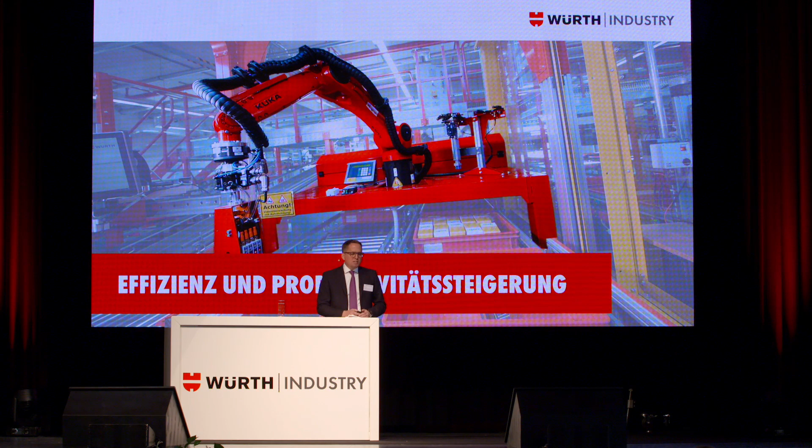This is certainly a challenge in this respect. It is all about bundling, pooling quantities, tied capital versus supply frequency and available inventories or parts at the workplace. The top objective is increasing efficiency, gaining productivity. For you, as our customers, this means saving distances to be covered, saving time for your workers. At the end of the day, this means reducing costs. This by way of introduction to this topic.

What was the situation yesterday? What was it like? You see, the worker was in the focus, center stage of everything that is going on in assembly. In addition, the assembly or production worker also had to handle a lot of unproductive processes, logistics processes, around the entire job.

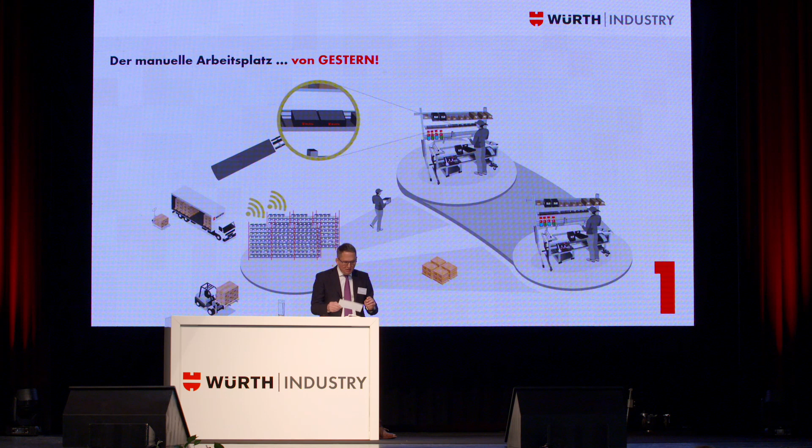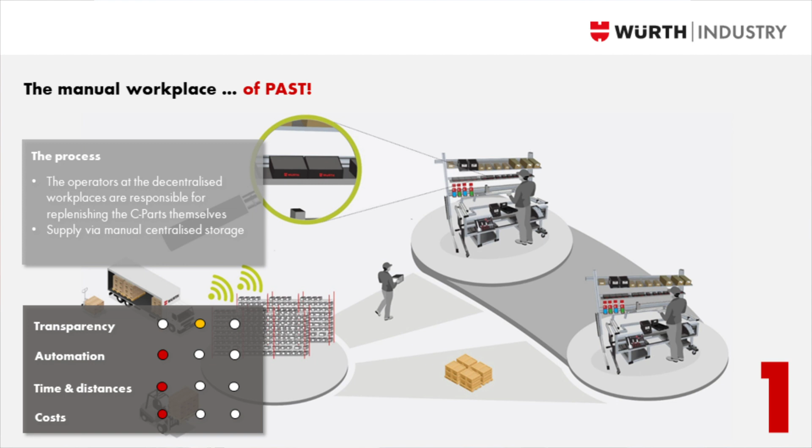Having a closer look at the shop floor, here we see two workplaces, and we also see our central warehouse outlined here. This chart will stay with us during this presentation, showing how it has changed over time, where we see changes, and what we think the future will look like. What is the process or sequence of steps?

The worker at a decentralized workplace is responsible for supplying C parts, either getting them from the central warehouse or from the respective supply supermarkets. Transparency is given in the central warehouse because of our tracking system. The level of automation is relatively low, and this is not ideal in terms of costs, because the time for unproductive jobs is relatively long, so this is time lost.

As industry service, we invested a lot of energy, time and effort looking at the processes and Kanban systems of our customers and at our place. In the past, we focused on the processes which we need on a production line or in our warehouses. So the foundation we laid was standardizing our systems.

1.8 million bins, this is what Martin Reuss mentioned, and 95% of these are black, called W-KLT 2.0. This means 95% of our shipments and dispatches, which we deliver to our customers in terms of Kanban, will be done using our own bins.

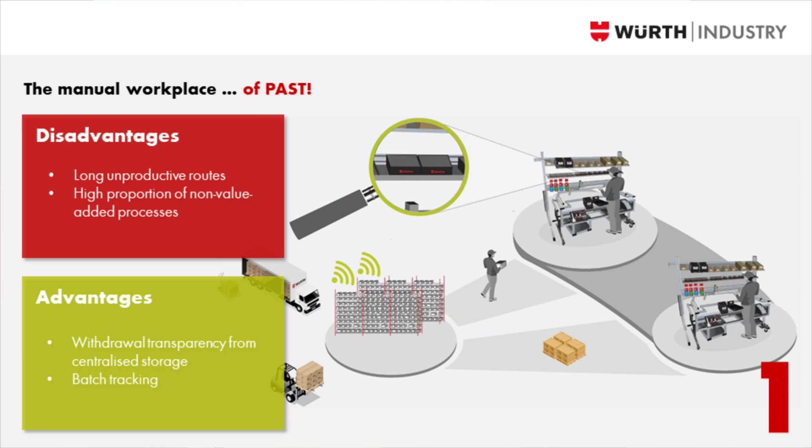To sum up, looking at workplace supply and the concepts we used in the past, this was characterized by unproductive times and a respective sequence of steps. The workers had to do logistics activities, cover long distances, search around, and look for things. So these are unproductive activities and actions. The central warehouse was transparent, but the workplaces were not yet interconnected and not equipped with the respective technologies.

What is the situation today? What are the problems we face today? This is quite interesting, because these are concepts which we're going to present during our exhibition today. This means you will be able to get to know these systems live. Technology is being increasingly used in processes. The processes get faster and more productive.

Then we've got the smallest bin projects. How are they executed? These are processes which we've installed at our customers: two circuits, one loop between Bad Mergentheim, our logistics warehouse, and our customers' places, with a supply station in between, and then there's a second circuit between the central warehouse and the workplace.

The smallest bin is being prepared in terms of logistics. Our classic W-KLT is the parent bin or transportation bin, and there is an empty parent bin which is scanned in the central warehouse, and it will make sure to get the respective parts.

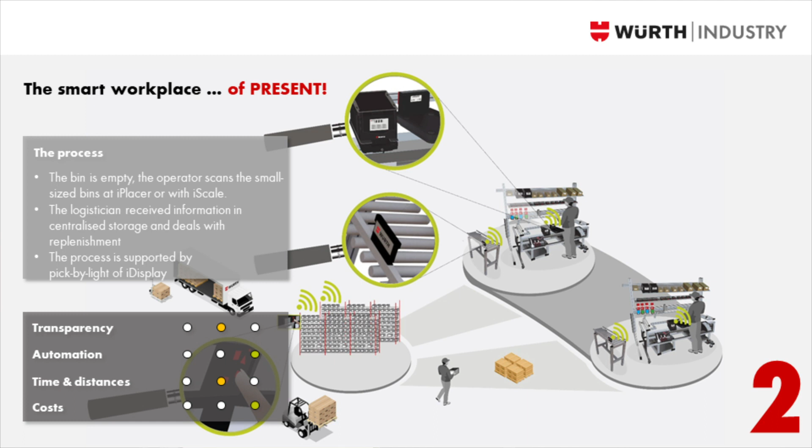The worker in the central warehouse gets information about the scanned bin, has the possibility to use a pick-by-light system coming from the iDisplay, can pick the respective parts, make them available, and then deliver them via a tugger train or for filling a specific workplace. So all this is made available. This means the entire process becomes transparent. Everything is automated.

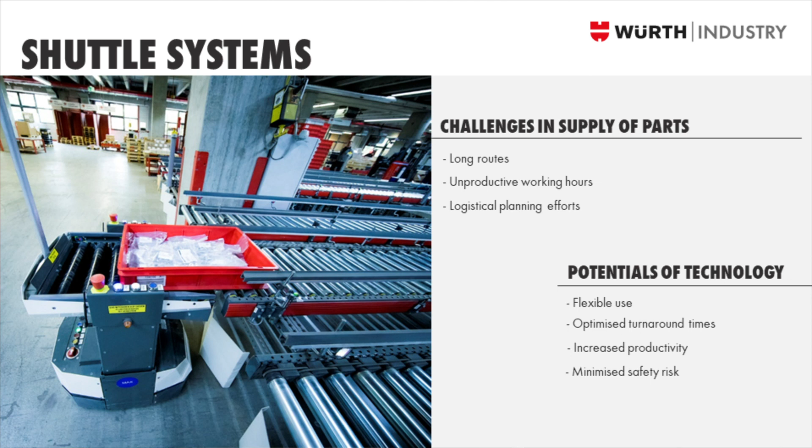Then there's one topic I mentioned before: how do goods reach the workplace coming from the central warehouse? The request was sent, the iPlacer, the iScale - we talked about it - at the push of a button on the display. Everything's being prepared at the central warehouse, but how do these products then reach the workplace of our customers? The worker picks it up - that's not a good idea. We discussed this already against the backdrop of the shortage of skilled workers. Surely it is worthwhile thinking about it.

Tugger trains are standard today at many of our customers, and they are compatible with our systems in a seamless way. Or there will be an autonomous vehicle, an AGV, taking these goods to the workplace. This is a system we are thinking about in more specific terms - how our systems can be integrated into such solutions. An autonomous vehicle can bring bins, containers, but can also exchange whole shelves and replace them with new ones, handling the respective new goods arriving. This is an aspect you can see at our exhibition this afternoon - we want to show you our first ideas.

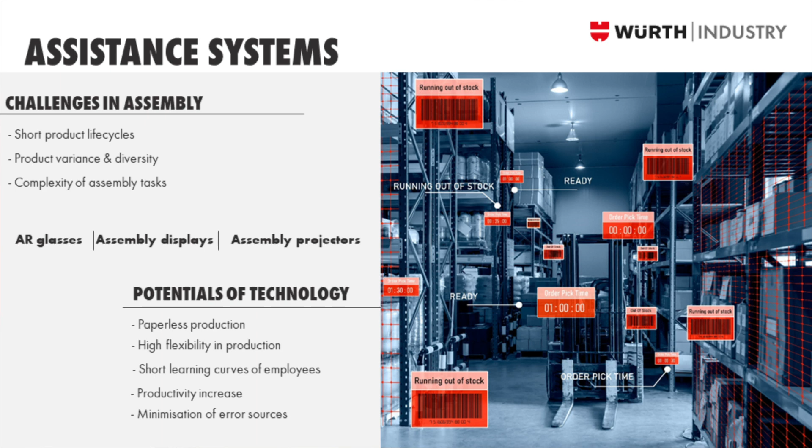The second part: assembly assistance systems. We are a C-part service provider. We are certainly not a company producing these assembly assistance systems and integrating them. No, there are many good companies in the marketplace. They offer professional solutions, but at the end of the day, assembly and C-part provision works hand in hand, hand in glove if you like, and is interconnected.

So we've got the assembly instructions, individual steps are worked out, and the workers are guided through this sequence of steps, and this also involves the interconnection of systems. At the end of the day, the assembly process is broken down by steps, allowing the worker to go through the process cleanly, with documentation also possible. Training time, error proneness, the various process steps being checked, traceability of production data - all this is guaranteed. Data is stored in the system covering core components: assembly instructions, tool tracking, reproducibility of production data, etc. This means we will be able to optimize processes involving all the necessary data.

We collect a lot of data, an unbelievable amount of data from the entire supply obligations, from our processes, from our systems. We have developed and digitalized these systems consistently over the last few years, and these systems are to be of benefit to our customers.

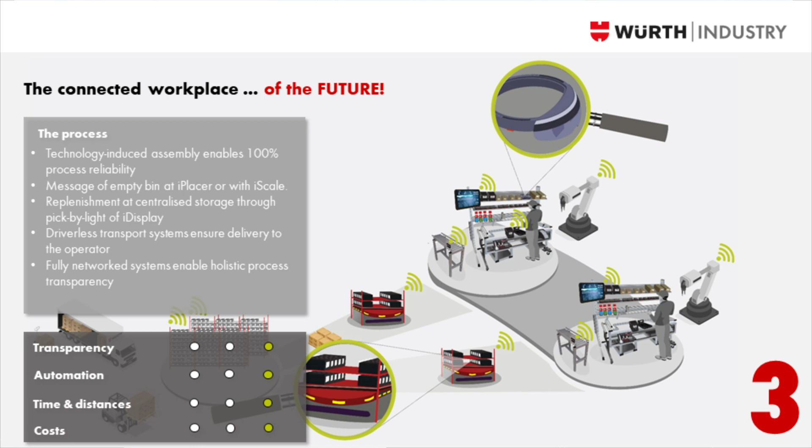All right, let us have a look at this chart again. It has been with us during this presentation, and technology is being increasingly used. Processes from a logistics perspective can be compared: the worker triggers the respective requirements using our systems, but then it is no longer a logistics worker carrying these parts to the workplace. No, we've got AGVs doing that.

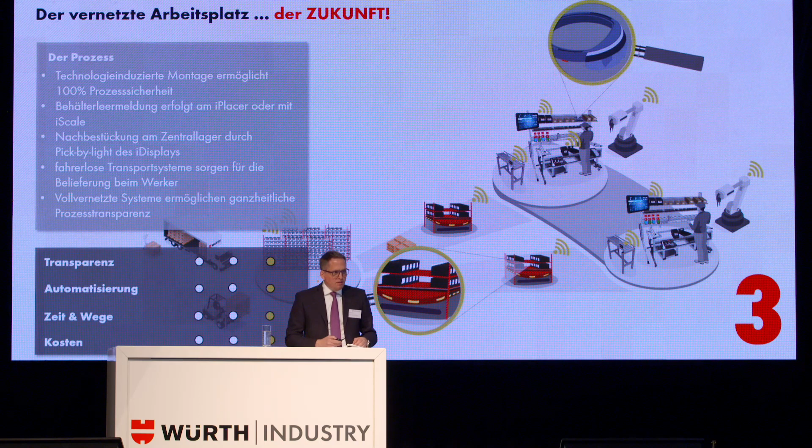All these systems are interconnected, and this means we have a holistic approach in terms of optimization of processes. By way of conclusion, I should say concepts which were good yesterday need not be poor or not good today. These are ideas with a view to the development of workplaces.

This block in my presentation was a bit larger because I wanted to make the situation we face today clearer to you, looking at the various process levels, showing that we can offer you good systems. We're looking to the future, interconnecting our systems, giving you an idea of what's up our sleeves.

The concepts, as in the past, are good. I do not want to talk it down. If you've got a central workplace, if it is about central supply of systems, then I can only say that the range of possibilities has widened. We've got a whole bunch of solutions available for you.

They do not address only a central point, but have been broken down into very small, granular items so that they can be integrated into processes seamlessly. And our processes of course are more reliable, more interactive. Now they interconnect more and more internally at our place, but also on your premises.